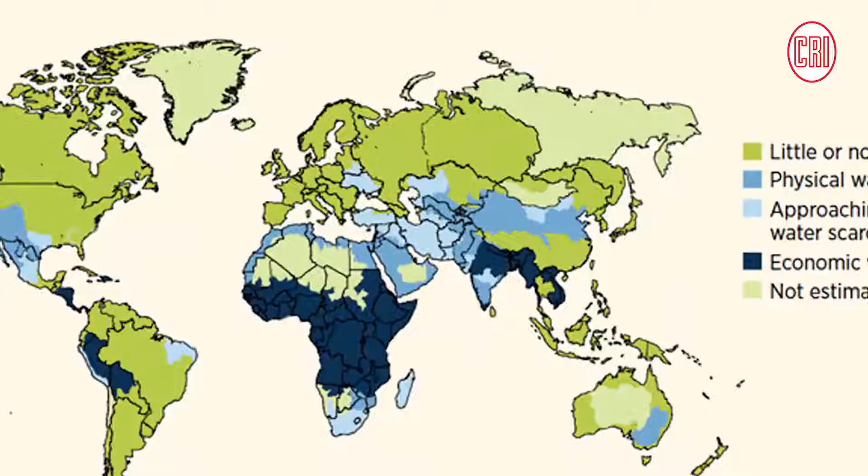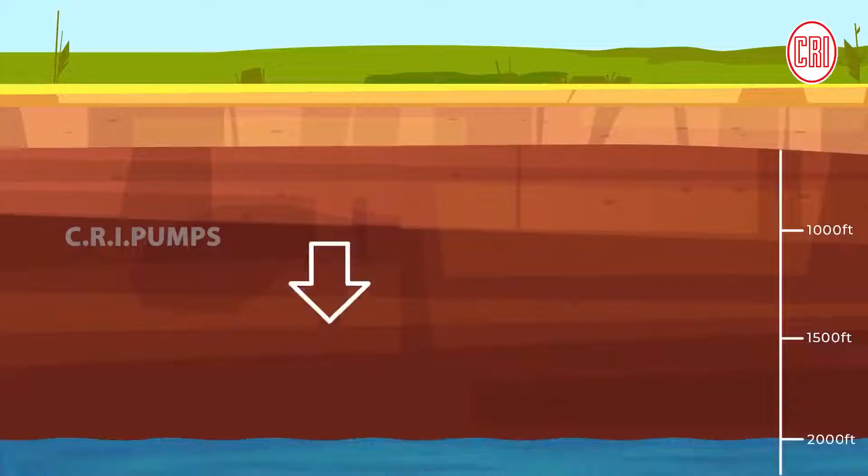Groundwater level in major global cities is heavily depleting. In major Indian cities, the number of wells having groundwater at greater depth has increased according to the Central Groundwater Board's CGWB report. When the groundwater level goes below 2000 feet, pumping water becomes really challenging.

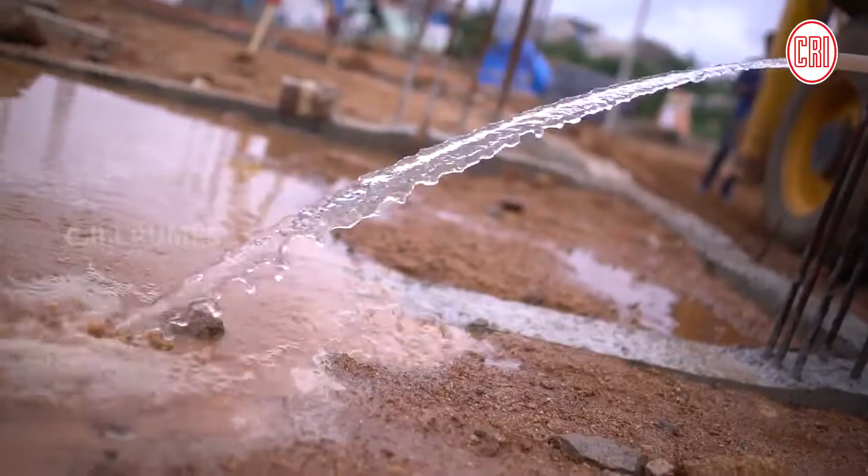When there are many pump manufacturers still trying to develop the pump that can lift water beyond 2000 feet, C.R.I has been successful in delivering pumps that can lift water in tough situations like beyond 2,200 feet below the ground level. C.R.I is the first company in India that has products to pump water from such depths.

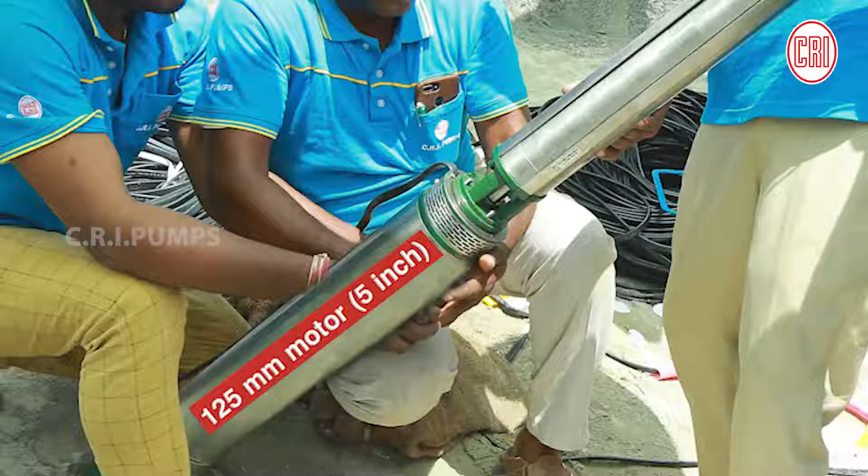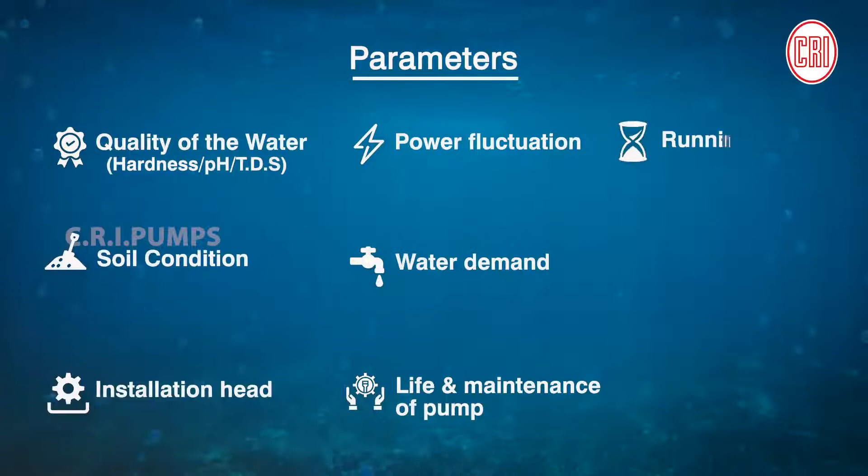When we get challenges like this, we usually analyze various parameters before developing the pumps. Installing a 2000 feet bore itself is a big challenge. Some of the other difficulties we analyze include diameter, the yield of the borewell, parameters, quality of the water, hardness, pH, TDS, soil condition, installation head, power fluctuation, water demand of the customers, life and maintenance of pumps, running hours, switching frequency, and required HP rating.

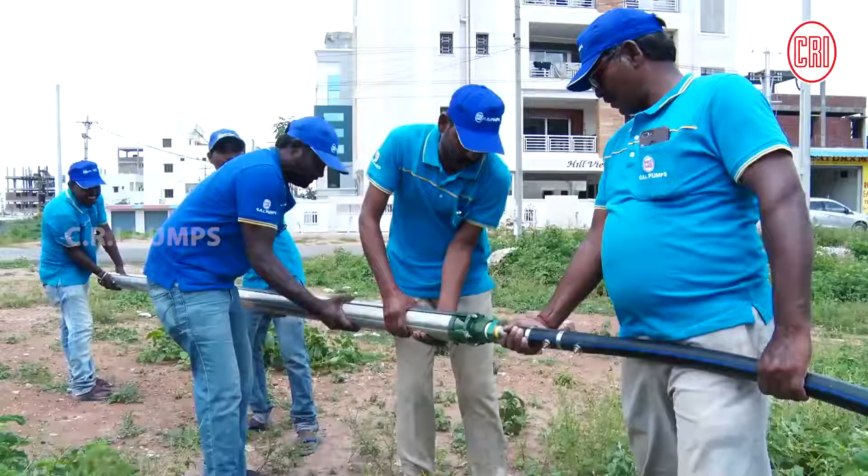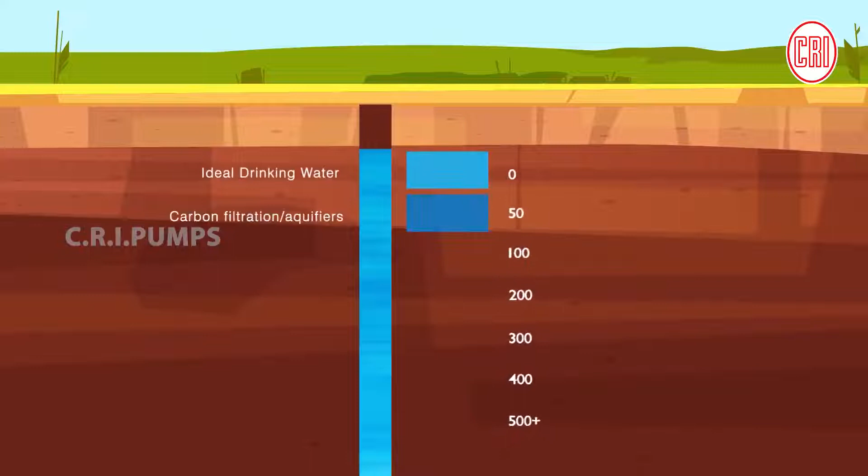While designing the pump set for borewell application for higher depth, there is a diameter restriction, and also there is a requirement of higher rating motors with multi-stage pump set. Also, to avoid the dry run, the discharge yield of the borewell is a major constraint. When we dig high-depth borewell, the water quality itself shall be with more hardness and higher TDS. Considering these factors, we use high-grade quality corrosion-resistant components in the pump and motors for durability.

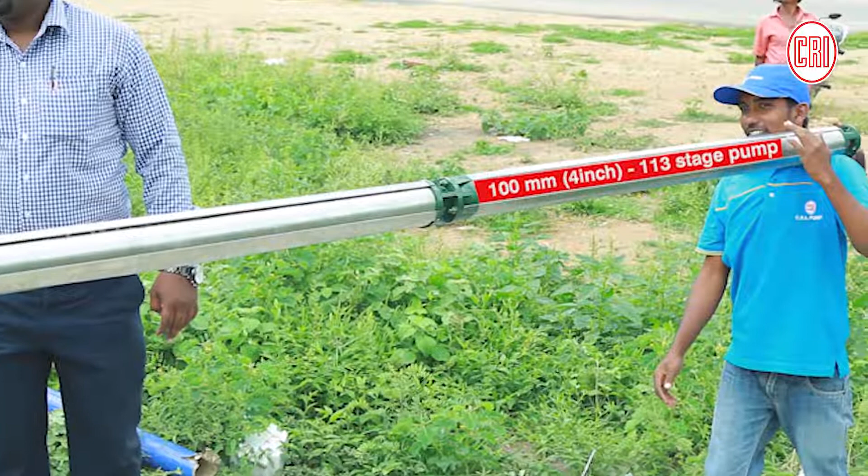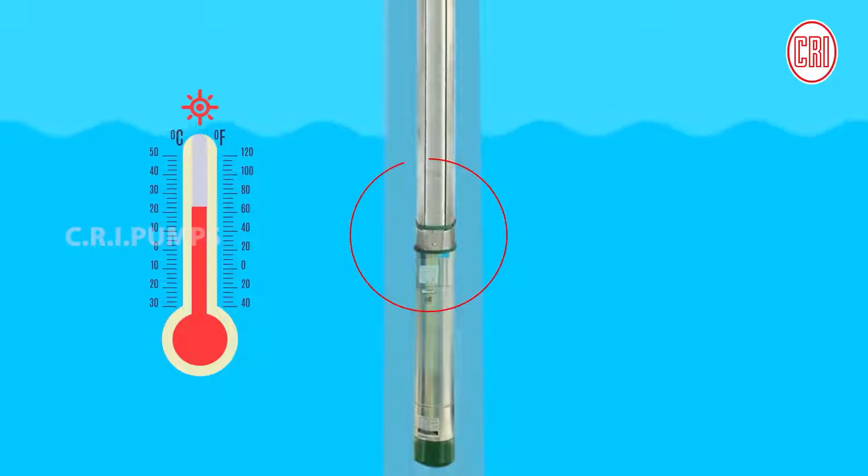During the course of running, as well as frequent on and off of the pump set, there is high heat along with more thrust load impact on the pump set. To absorb high thrust load and for better cooling of the motor, we have designed the motors in such a way with superior grade self-lubricated bearings and thrust pad.

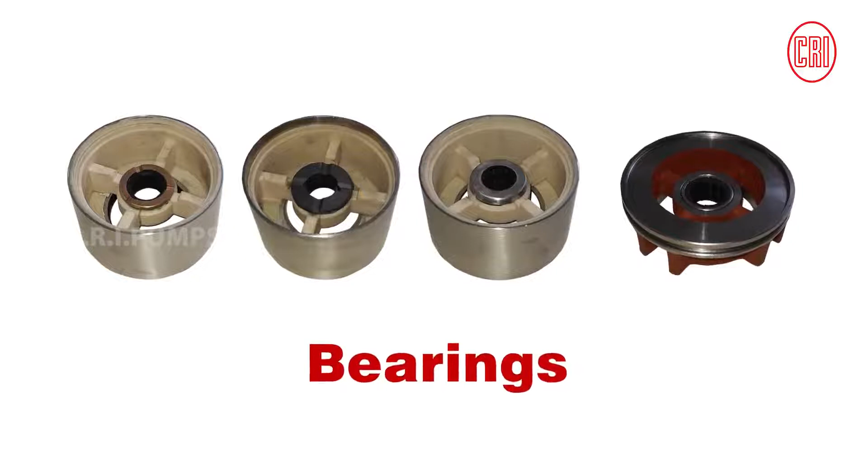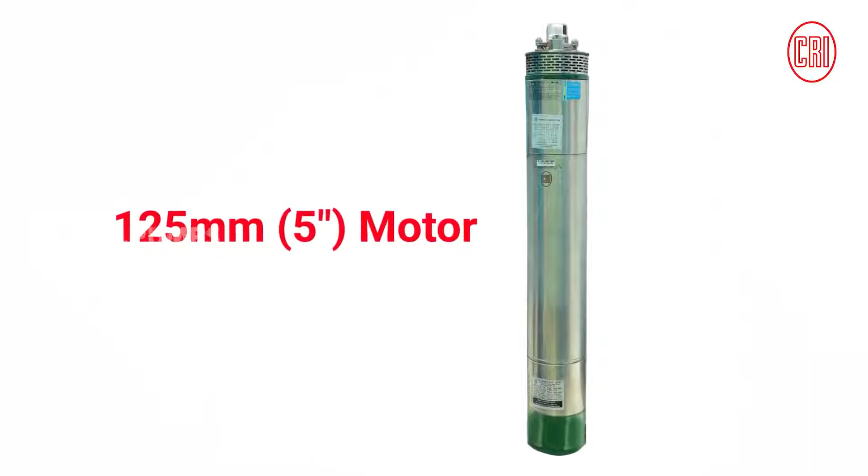For more depth, we need higher stage pumps. For such case, C.R.I has specially designed 125mm 5 inches motor for rigid performance and 100mm 4 inches split type coupled pump to make sure all the rotating parts are well balanced for better mechanical stability and trouble-free operation.

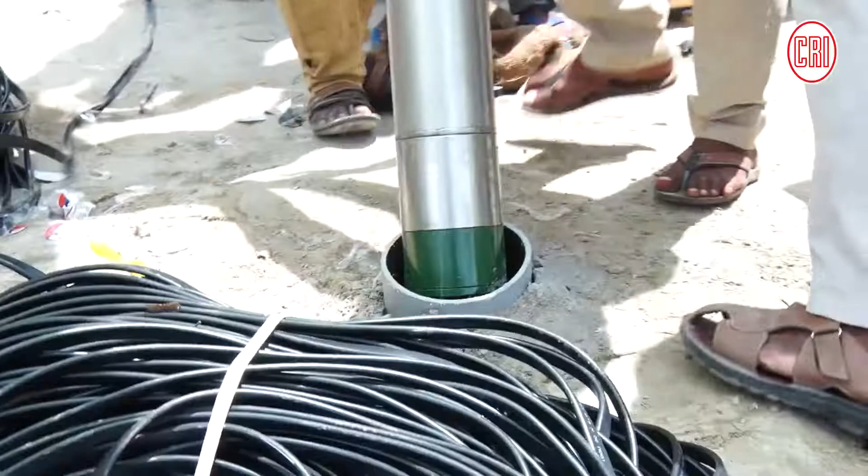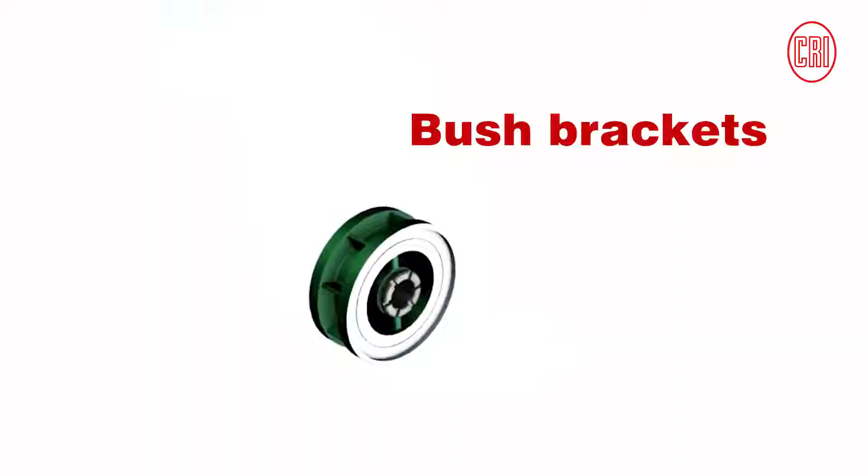The customer invests enormous money to install the pump set for higher depths and expects trouble-free operation and less maintenance. We have regarded these aspects and worked on the necessary bush brackets, bearings, heavy locking strips, split type pumps, etc. to perform under wide voltage fluctuations and for the efficient running of the motor.

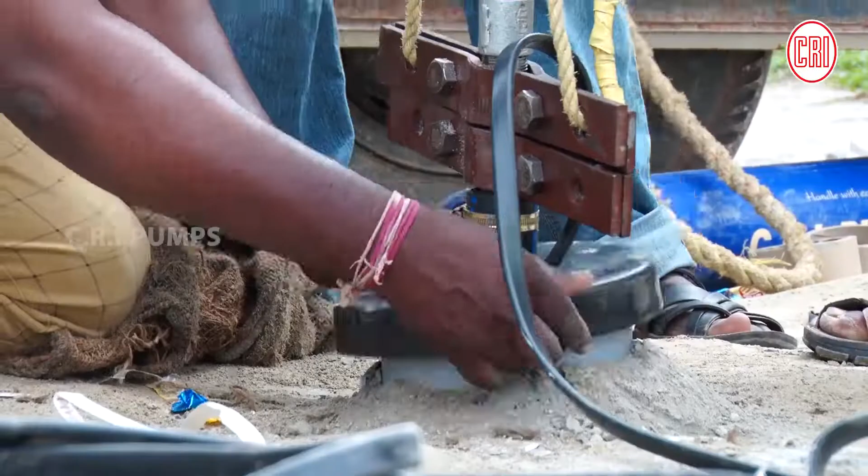These motors are designed with high-grade 99.97% virgin copper winding wires, low-watt loss silicon stampings and automated induction silver-brazed copper rotors. Using these above parameters and after numerous experiments, we formulated the right algorithm to recommend the client a perfect pumping solution to solve their water crisis and withdraw water from beyond 2000 feet.